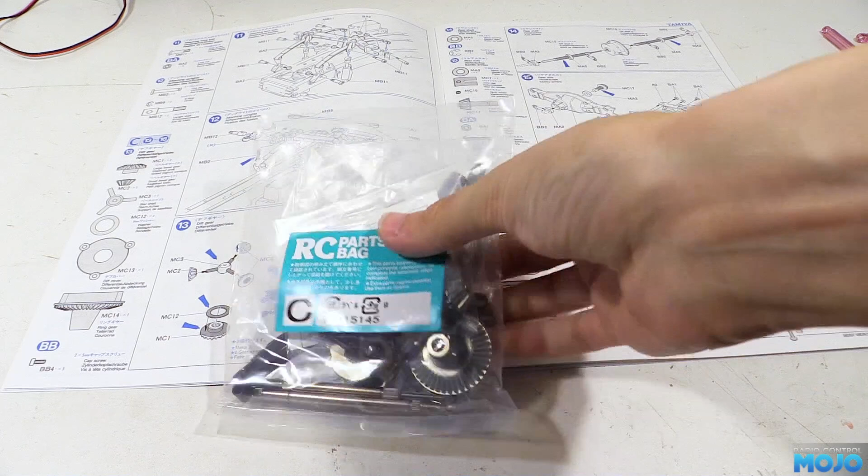This week we're putting the rear axle on the Tamiya 1850L. This of course is the drive axle, so we've got the differential and all the bits to assemble before hanging the axle on the chassis.

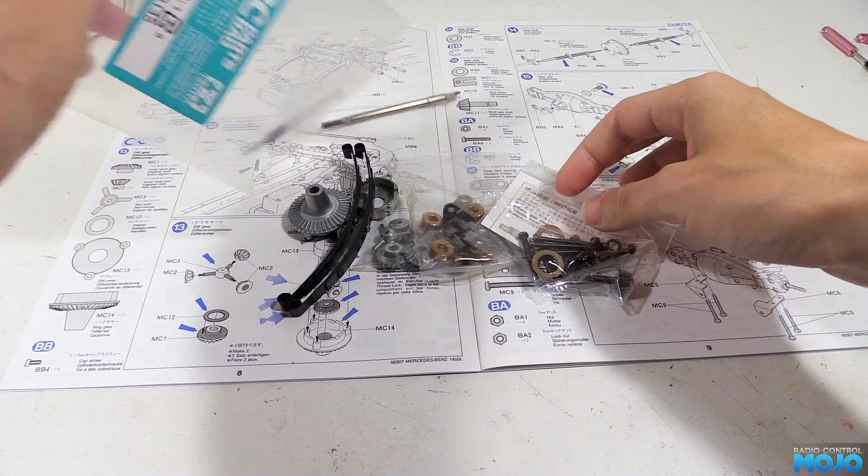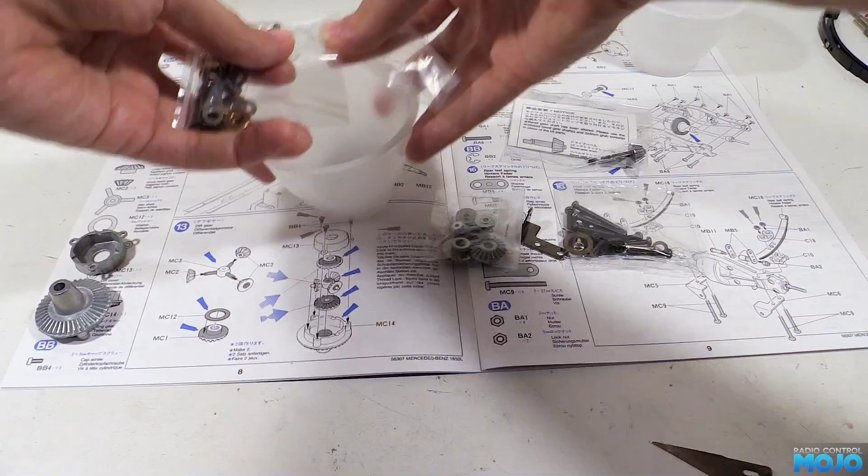In bag C then we've got a nice range of bits to play with. There's some familiar leaf springs, exactly the same ones as on the front. There's the damper mounts, an interesting packet with a pinion in. Now it looks like this truck, being one of the older 1/14th kits, has been updated to match the new kits. As usual then, we're going to pour the small parts bags into some plastic pots. There's a few bushings in this lot, so we will of course be replacing them with some proper bearings as we go.

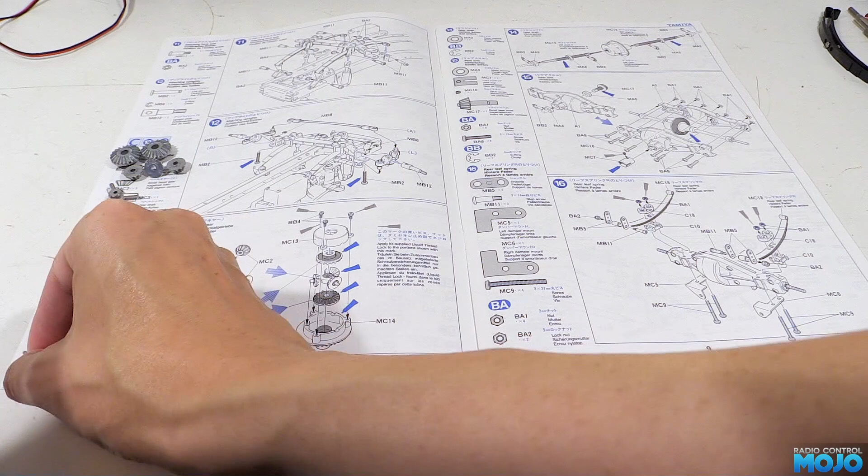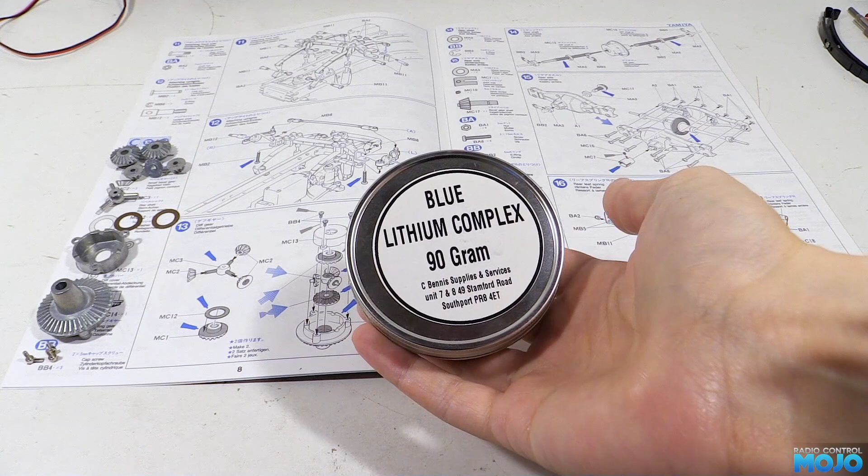For step 13 we're going to need the internal diff gears, which I'll add to the diff case halves I've already put out. We'll also need the two large skinny washers and three M2x5 cap head screws. Inside the diff we're going to be filling it up with some grease. Now Tamiya want us to use the ceramic grease from the kit, which after a bit of running usually ends up with a very free running differential. But I'm going to try using some of this blue lithium instead. It's a lot thicker and stickier, so it should add a little bit of stiffness.

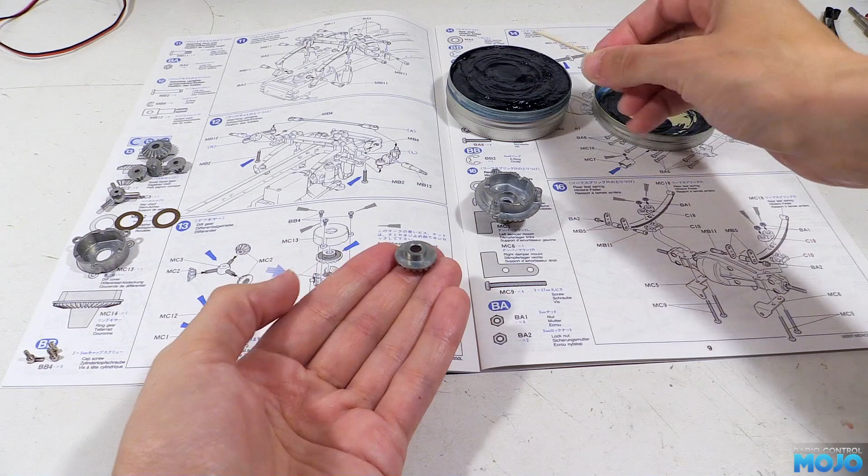The usual problem is, with a really free differential, if you're driving over uneven ground and one of the drive wheels gets a bit light, when you try and drive forward, all that happens is one of the wheels spins and you don't go anywhere. Now some people lock the diffs completely solid, which gets around the problem entirely, but it does increase the turning circle, so a good thick grease should be the best of both worlds.

A quick note from the future though, the blue lithium I use does make the diff slightly stiffer, but not by much. The theory's sound though, and I've heard that Lucas red and tacky grease works even better. Right, back to the build.

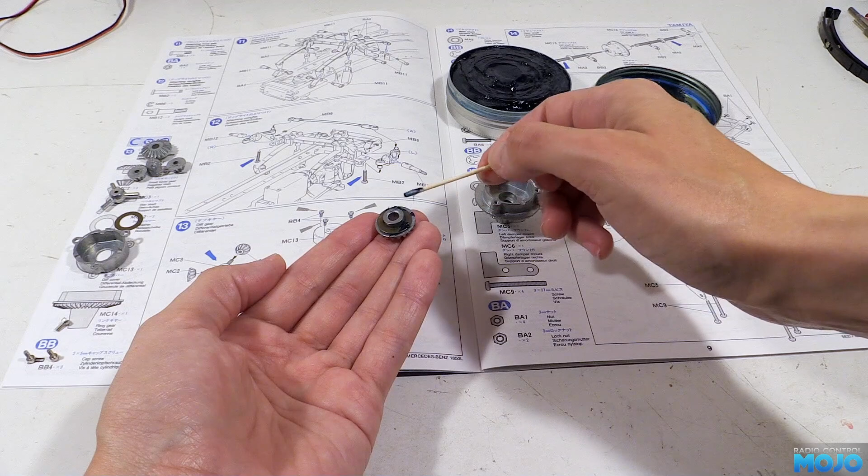Now we're going to start with one of the large internal gears and smear some grease on the inside face. Pop one of the big washers over the top and apply some extra grease. The idea behind the washer is to avoid the soft cast metal from wearing on itself. Having the smooth steel between makes everything last quite a lot longer. The gear now just drops into one side or the other of the diff housing. I tend to start with the side with the gear moulded into it.

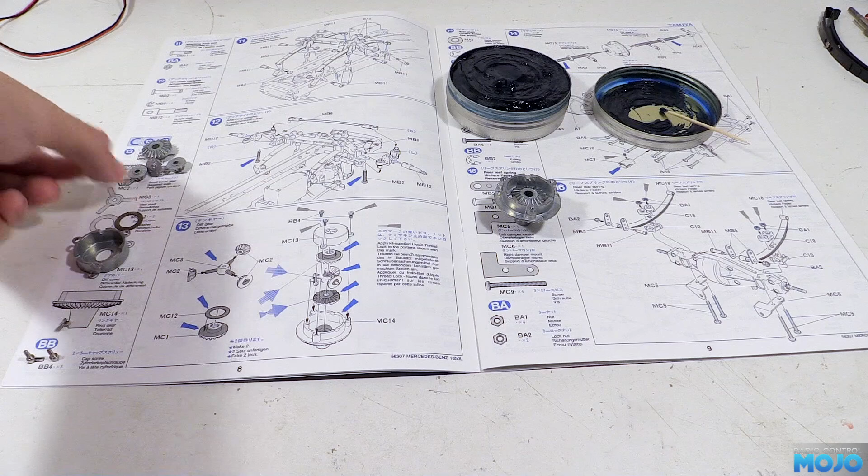Next we've got the star shaft and the little gears. Now each one needs a little bit of grease applying to the shaft before sliding on one of the gears. Don't worry about using too much, it's all going to get squeezed and spread around inside the diff anyway. Just watch out for getting any on your fingers. This blue stuff can be a bit stubborn to wash off.

Before dropping the star shaft into the case, we'll put a load of grease all over the gear in the diff. Again, we're going to use plenty. Pop the star shaft in, lining up the ends of the shaft with the notches around the diff case. Press it all the way down, and apply some more grease to fill the gaps. There's the other of the big gears to get ready with some grease and a washer, and with it all greased up we can pop it into the other half of the diff case.

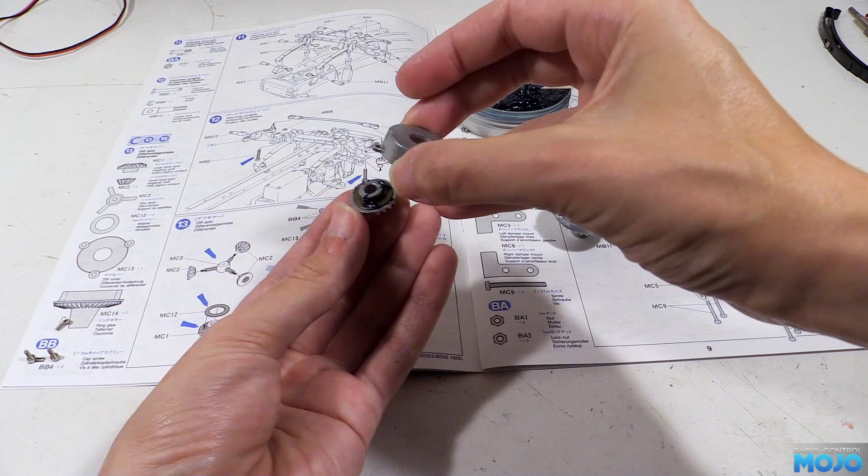Now before we screw the two halves together we're going to apply a little bit of thread lock to the threaded holes. It's good to do because if one of those small screws comes loose it can wreak all kinds of havoc inside the axle. If one falls out and gets trapped between the gears, it really won't do the parts any good at all. Install the three screws, doing them up a little bit at a time until they're all nicely nipped up.

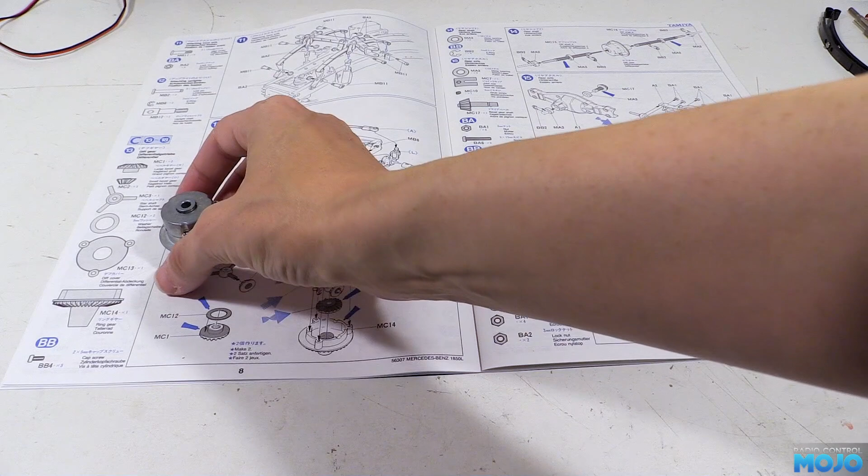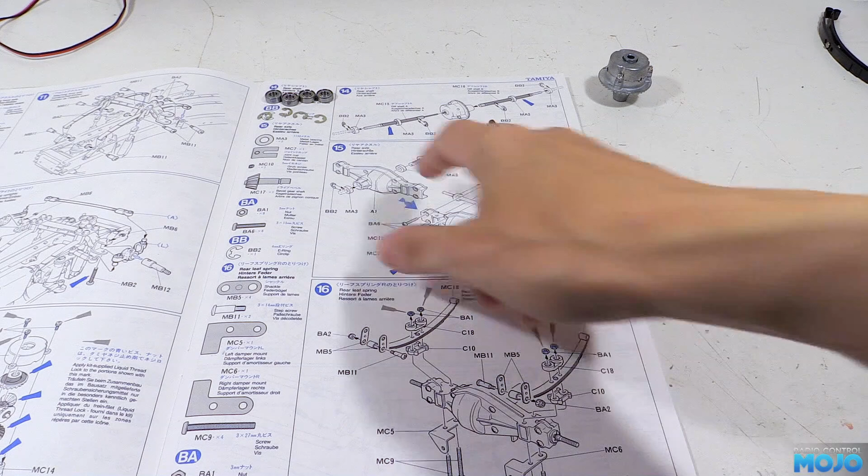Step 14, the axle shafts. This time we're going to need four 1150 bearings, four 4mm E-clips, and the two axle shafts. The diagram for these bits really isn't the clearest, and at first glance it makes it look more complicated than it really is. All we need to do is clip an E-clip in one of the slots at one end or the other of one of the axle shafts, doesn't matter which. Then we can pop two of the bearings on and clip an E-clip in at the other end. Same for the other shaft, and we've got the two shafts ready to go.

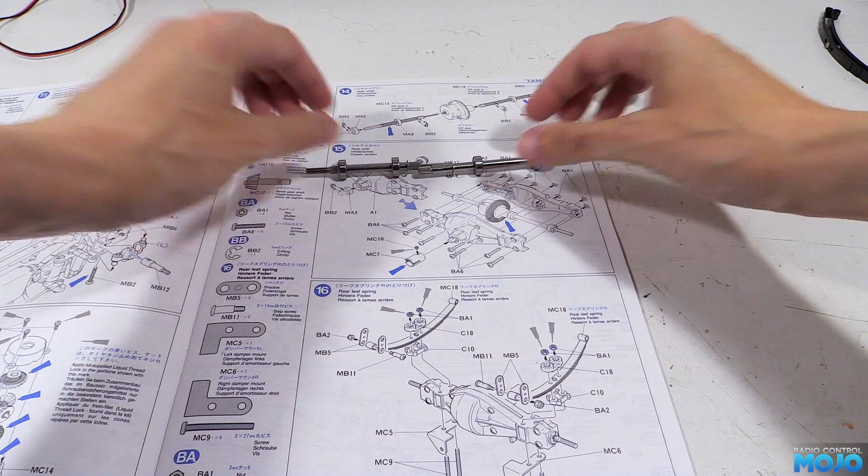Now one shaft has a pin on the end that goes into the hole in the end of the other shaft. The pin's going to spin in the hole when the diff's working, so we're going to use a little bit of grease on the end before we assemble it. In the gear side of the differential we can fit the shorter shaft, then on the other side we can fit the long shaft. Now at this stage if you try and turn the shafts in opposite directions it's probably going to feel very notchy and quite possibly you won't be able to turn it all that much at all.

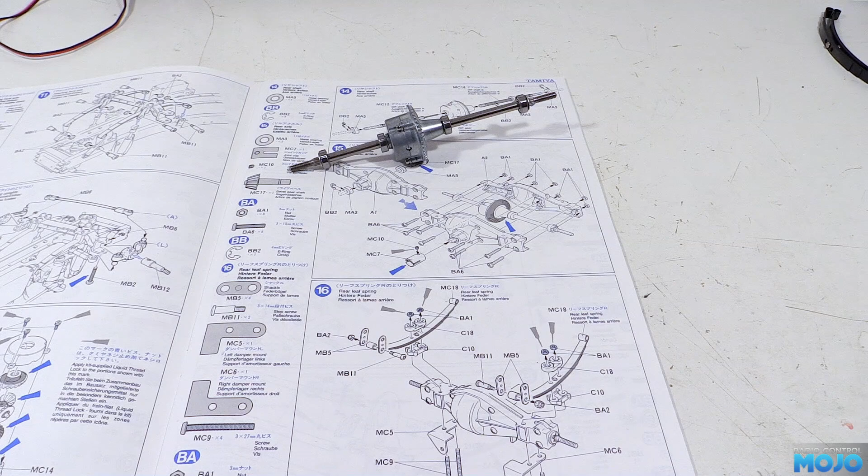Don't worry though, as long as you've assembled it correctly it's going to smooth itself out after a few minutes of driving around. It just takes some use to get everything to settle into position.

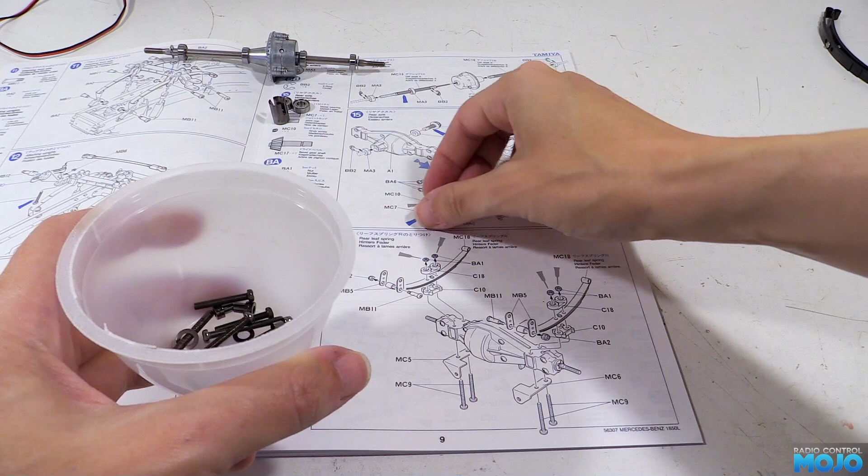Step 15, the axle housing. First up we need 2 more 1150 bearings, the drive cup with its short M3 grub screw, there's also the input shaft with the gear from the extra bag, which also comes with 2 more grub screws that are slightly longer than the one from bag C. Now it makes sense to use the longer ones, as we're going to be able to nip it up a little bit tighter without worrying about stripping the thread.

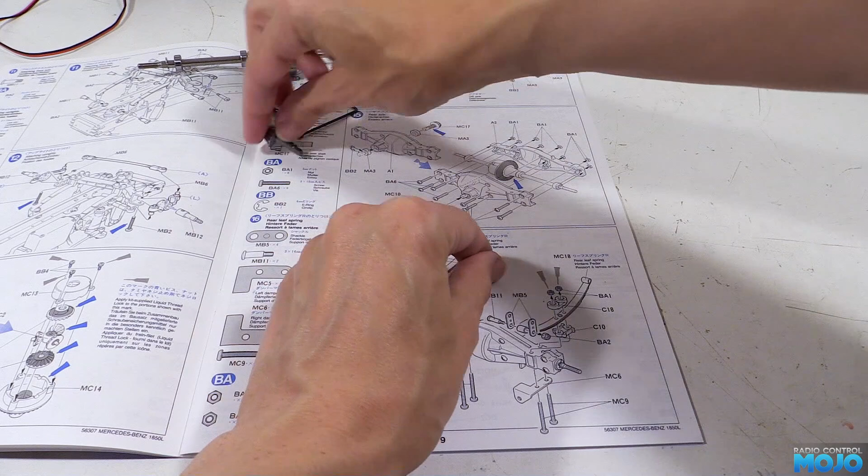So we don't end up losing the new grub screw, we're going to pop it onto the end of an Allen key, and we're going to put the extra long one and short one in the unused bits pot off to the right of the camera. Along with those bits, we also need 8 M3 plain nuts, 8 M3x15s, and a single 4mm E-clip. For the plastics, we just need an A1 and an A2, which are the axle housings.

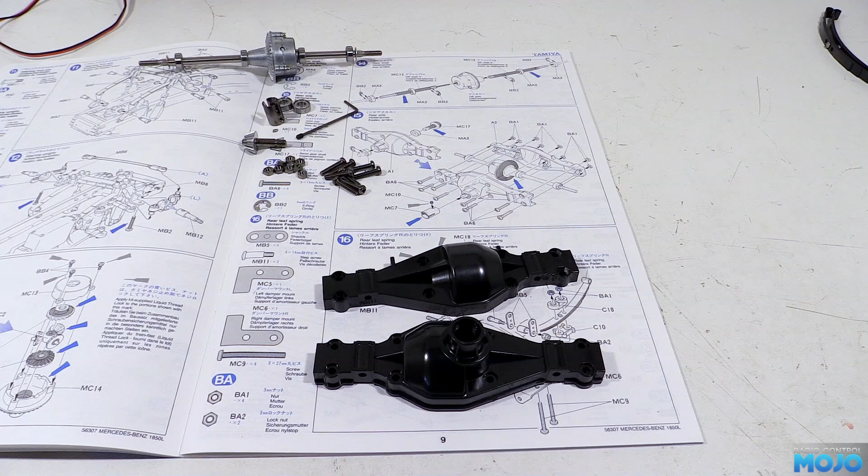Right, first job to get out of the way is to fit the input shaft. It uses the 2 bearings that we need to fit to the axle housing. The easy way to do it and get them in straight is to pop one on the end of the shaft and press it into the outside hole. It shouldn't need too much force, but we do need to make sure it's nicely seated all the way in. Then we pop the shaft out, add another bearing and reinsert it from the inside. Now the manual wants us to use some grease, but we're using bearings so we don't really need to.

With the shaft in, we can use an E-clip on the outside in the slot. Now usually with these Tamiya kits everything fits quite nicely, but sometimes it might be necessary to use a thin shim on one side or the other to adjust the mesh. I've never needed to, but I have come across a few people's builds where it was necessary.

Next we can fit the diff and the axle shafts in the housing with the input shaft. We need to make sure that the bearings are pushed all the way to the ends of the shafts so they're up against the E-clips. In the axle housing there's some little cups moulded in that keep the bearings in position. Before we fit the other half of the axle housing we need to run some grease around. I'm going to use some of the Tamiya grease here as it's quite a bit thinner than the blue stuff, so it's going to drag a bit less when running.

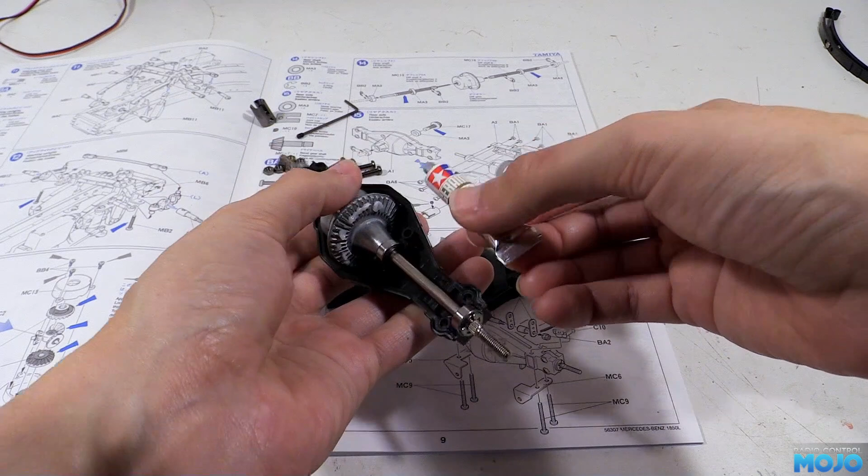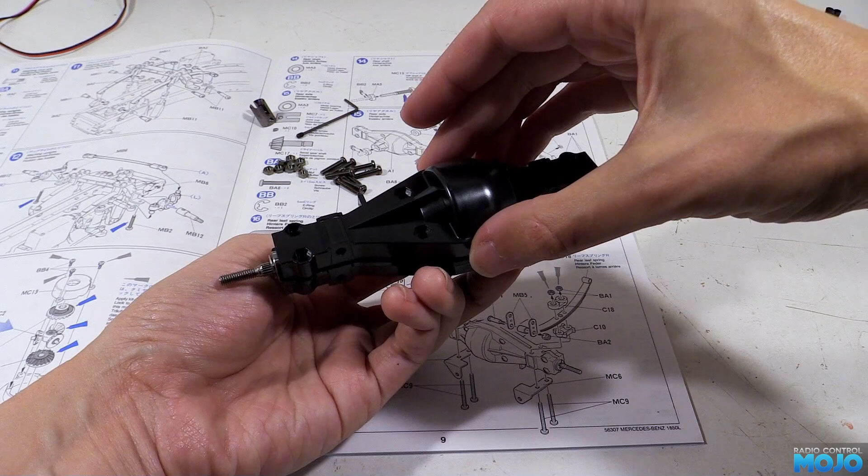Although, because these trucks usually run very slowly, it doesn't really matter too much what you use as long as it's nice and slippery. If we spin the diff a few times we can see the grease getting spread around nicely. As long as you end up with some grease over pretty much all the teeth, it's going to do the job. To attach the 2 halves we use the M3 screws and nuts. On one side there's 8 hex-shaped holes for the nuts, and on the other we put the screws in.

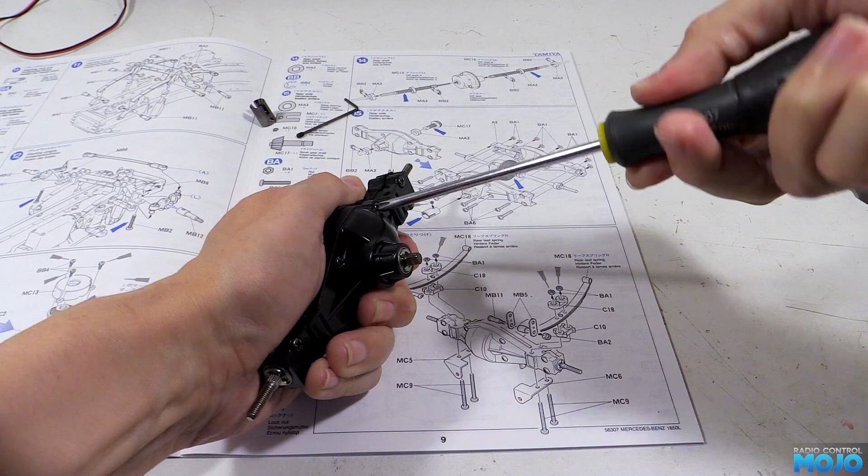It's not a bad idea to use a little bit of thread lock on these, but you can get away without as long as you keep an eye on them. If a couple come loose, it's not the end of the world. Or of course you could always replace all the nuts with some nylocks, which will lock them without the mess.

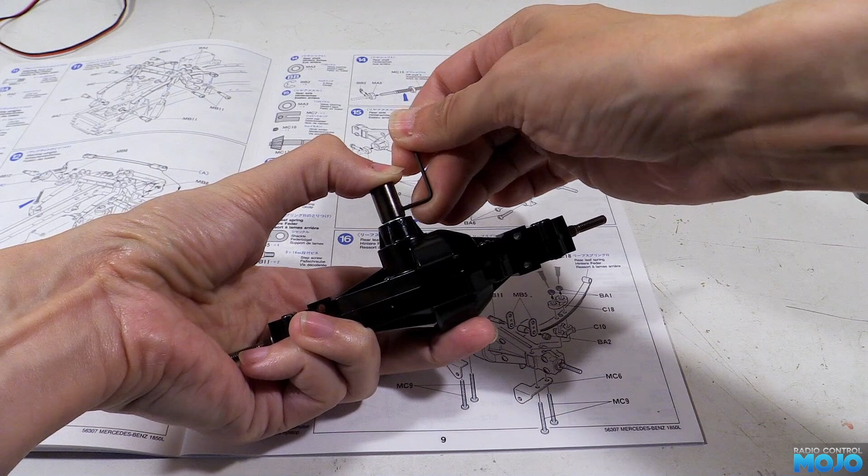There's one more bit to do now. We need to add some thread lock to the grub screw and install it a couple of turns into the drive cup. Pop it onto the input shaft, lining up the grub with the flat. Then while gently pressing it on, we can nip up the grub screw. Right, we should be able to turn the drive cup and see the ends of the axle turn. It's probably going to feel a bit notchy, but I wouldn't worry too much. It'll soon smooth itself out.

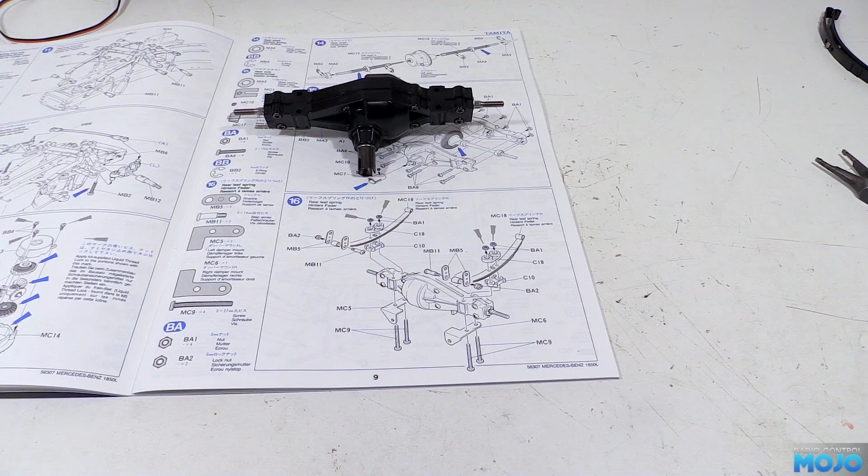Step 16, fitting the leaf springs. For this one we need the bottom damper mounts, the 4 shackle plates, 2 shoulder screws, 4 M3x27s, 4 M3 plain nuts, and 2 M3 nylocks. For plastic bits we need 2 C10s and 2 C18s, the bits that sandwich the leaf springs, and of course we need the leaf springs themselves.

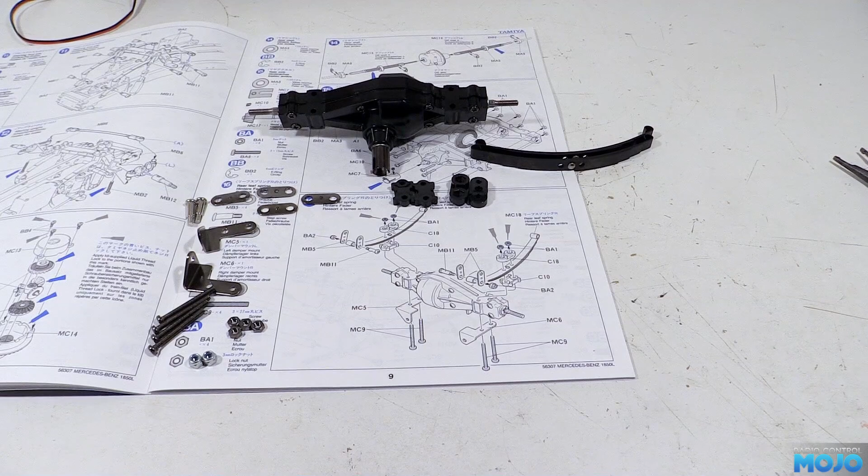First we need to make sure that we've got the axle the same way round as it is in the diagram. The input shaft should be facing away from us, and the tapered bit on the axle housing for the differential to the left. Then we just offer up one of the damper mounts to the bottom of the axle, so the mount is towards the inside, and we pop in 2 of the long screws.

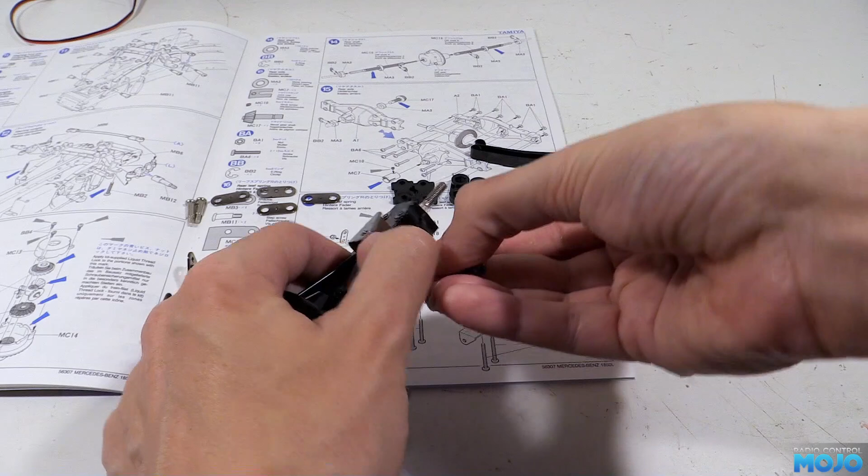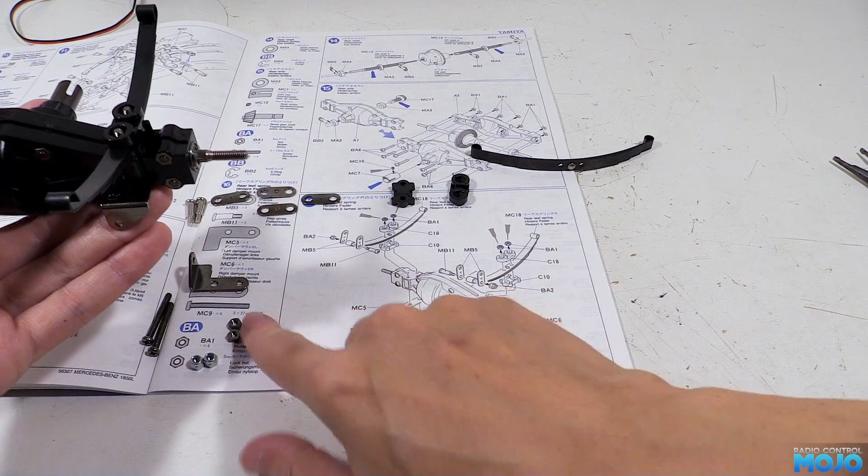Next, while holding the screws in, we need to fit a C10 over the threads, followed by a leaf pack, and then one of the C18s, making sure that the side with the hex holes is facing upwards. To hold it all together, we just need to install a couple of M3 lock nuts. Now these are good candidates for a bit of thread lock. We just need a little bit on the exposed threads, then we would undo the screw a few turns and retighten it.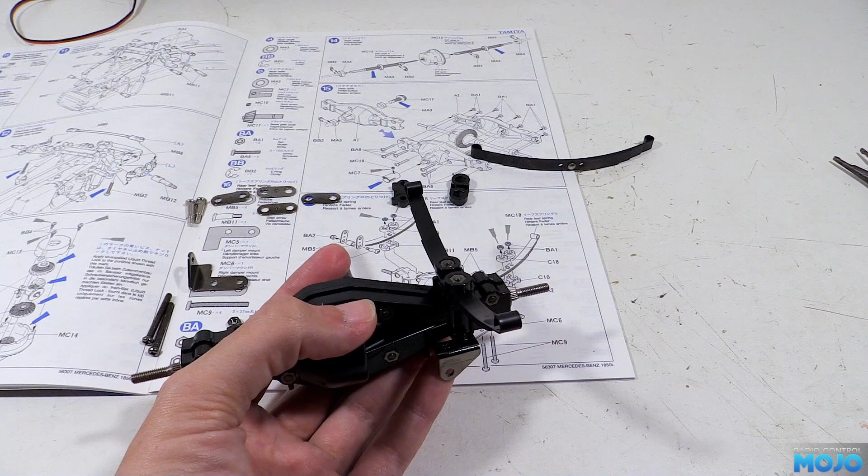Alternatively, there's plenty of exposed thread, so a pair of nylocks would work pretty well too. Repeat on the other side, and that's the leaf springs mounted. It's worth mentioning that the long screws are going to be loosened again, so we can set the position of the springs when we hang the axle on the chassis, so don't worry about doing them up super tight just yet. That leaves the shackles.

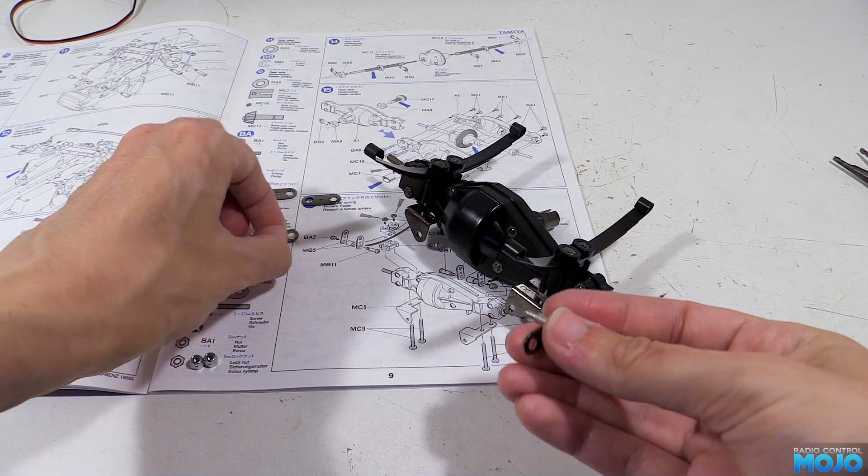All we need to do is pop one of the plates over the shoulder screw, insert it into the end of the spring, pop on another plate, followed by a nylock nut. The only thing to watch out for is that you install them on the right end. They should go to the rear of the assembly, so that's the side without the input shaft.

Also note, I installed the nuts on the inside, which worked okay on the Hercules Actros, but as we'll find out in a moment, you really do need the nuts on the outside on this chassis. Install both shackles, and we've got the axle ready to install.

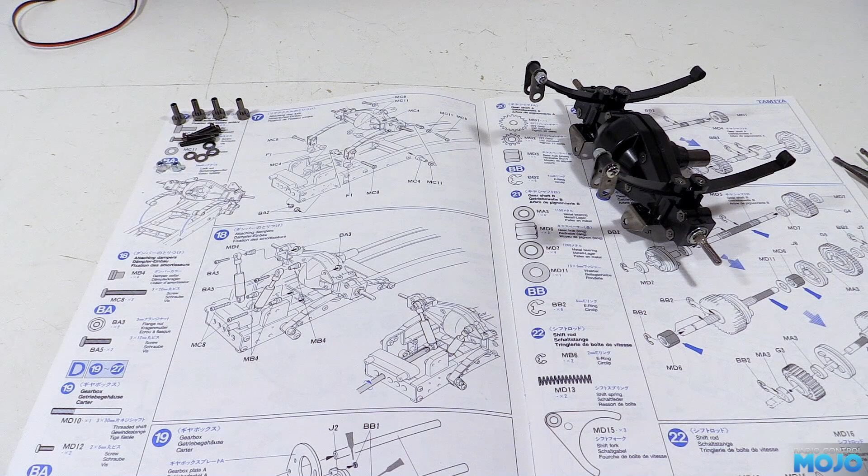Okay, step 17, hanging the axle. We're going to need 4 M3x20s, 4 leaf collars, 4 4mm washers, and 2 M3 nylocks. And then for plastics, we've got 2 F1 spacers. Okay, to mount the axle, we need to pop one of the leaf collars into the hole in the inner shackle plate. Slide on a spacer, then pop the other shackle plate over the end.

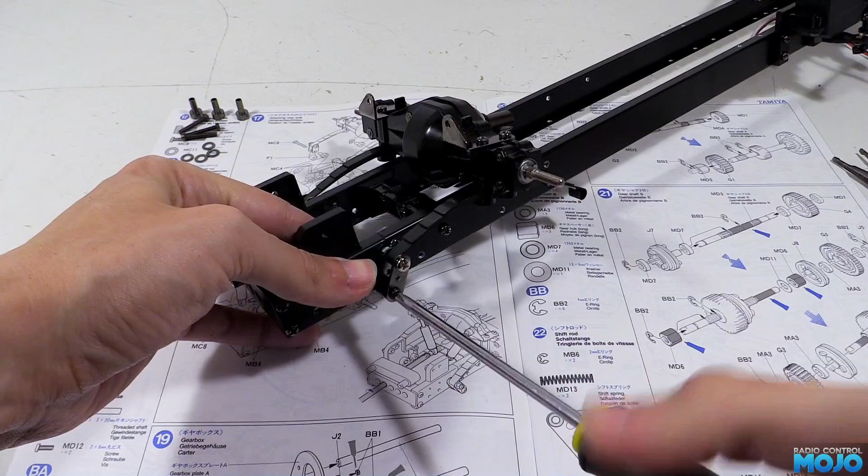It gets offered up to the hole on the chassis extension, and we use one of the nylocks on the inside where there's a hex-shaped hole to hold it. And we use one of the long screws from the outside. The collar is sized so we can tighten the screw all the way and not worry about any binding.

However, because we fitted the nut to the inside of the shackle, it does rub quite badly, causing a bit of a bind. It's a shame because it does look a bit tidier with the screw heads visible, but it's just not going to work. Still, it's easy enough to swap them over. We just remove the shackle from the chassis, then swap the shoulder screws around. It really doesn't take long, so no great loss.

Anyway, we can refit the collar, spacer and axle to the chassis extension, and this time it moves nice and freely. Install the other collar and shackle to the other side, and we can start working on the front leaf mounts. We need to use another leaf collar, this time inserted straight into the end of the leaf spring. There's no spacer, but we do use one of the washers on the end.

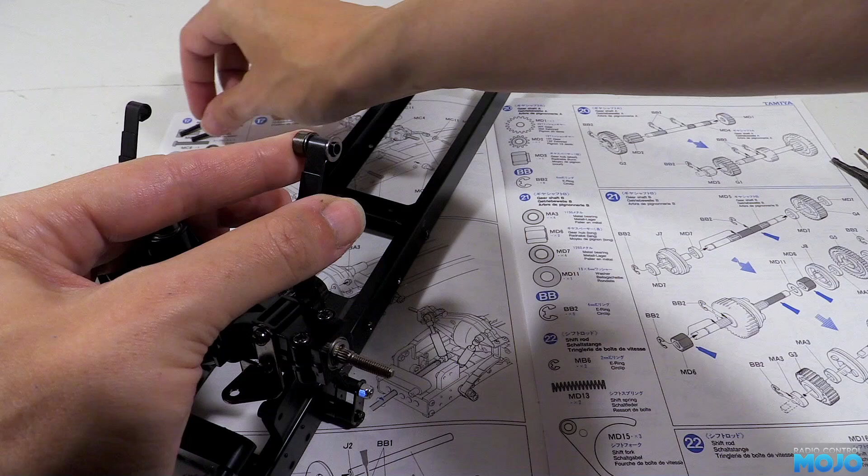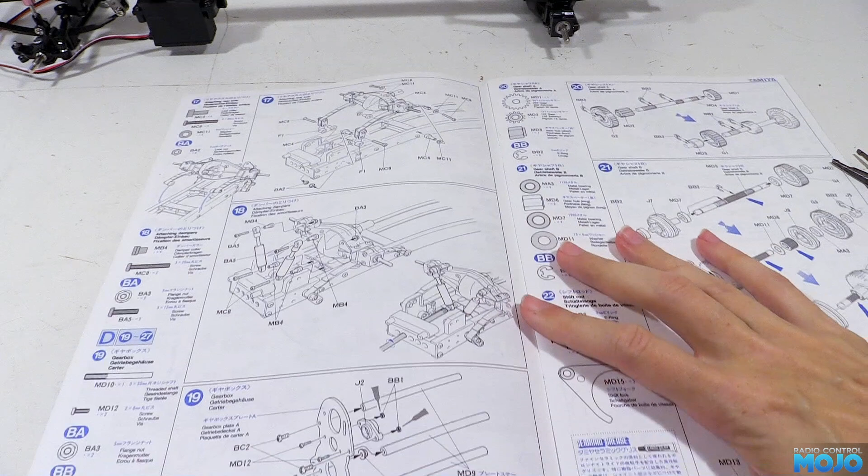To attach it, we use one of the long screws that screws into a captured nylock we installed right at the beginning of the build in one of the cross members. Again, the length of the collar means we can go straight in and tighten up the screws. Repeat on the other side, and that's the axle hung on the chassis. Don't forget to loosen the 4 screws that attach the axle to the leaf springs and retighten them. Just like with the front axle, it'll let the springs find their own position so they move nicely without binding.

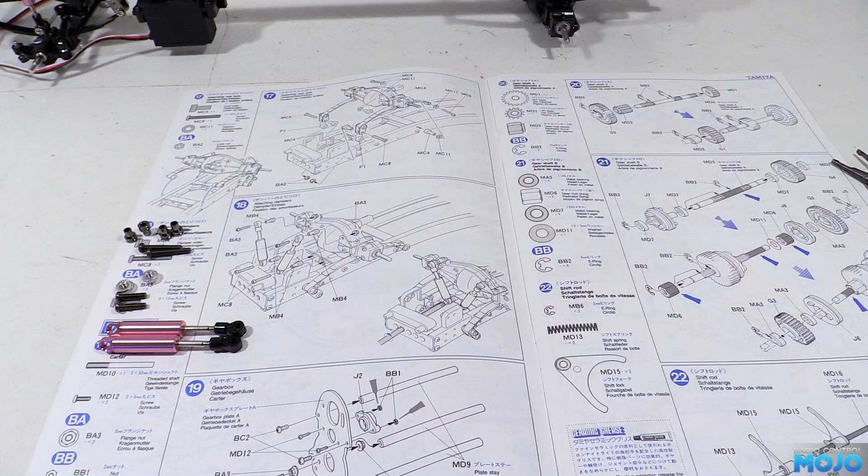Step 18, fitting the dampers. We'll need the 4 damper collars, 2 M3x20s, 2 M3 flange nuts, 2 M3x12s, and the dampers. The top of the dampers attaches to the cross members that we installed the press nuts into right at the beginning of the build. We just pop one of the damper collars in the top of the damper and install it with one of the long screws. Now it's important not to press too hard until you take up the slack, or you're just going to press the press nut out the back.

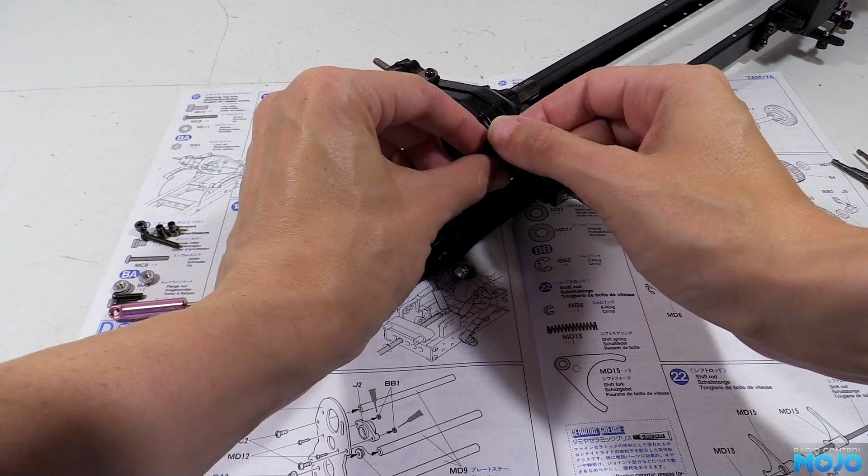Once it's nipped up, it's evident that we've got the same little niggle that we found on the Hercules Actros. With the bottom of the damper up against the mount, it's leaning back at quite an angle. When the suspension compresses, it's only going to get worse, causing a bit of a minor bind. It'll work okay, but it's such a simple fix we might as well make it work properly. All we need to do is add an extra plain nut behind the damper collar. You could use a stack of washers too, anything really that will space it off 2 or 3 millimeters.

Now when we fit the damper, the bottom lines up with the bottom mount with some angle to spare. Now when the axle moves back, when the suspension compresses, it's not going to bind. The bottom just needs another damper collar, one of the shorter screws, and a nut. When it's all nipped up, the suspension should move perfectly smoothly with a little bit of slop. If it's tight or stiff, you've got something that's unhappy. Generally, if you loosen all the screws and retighten them, it'll sort itself out. With the other damper installed, we've got the rear axle hung and ready to go.

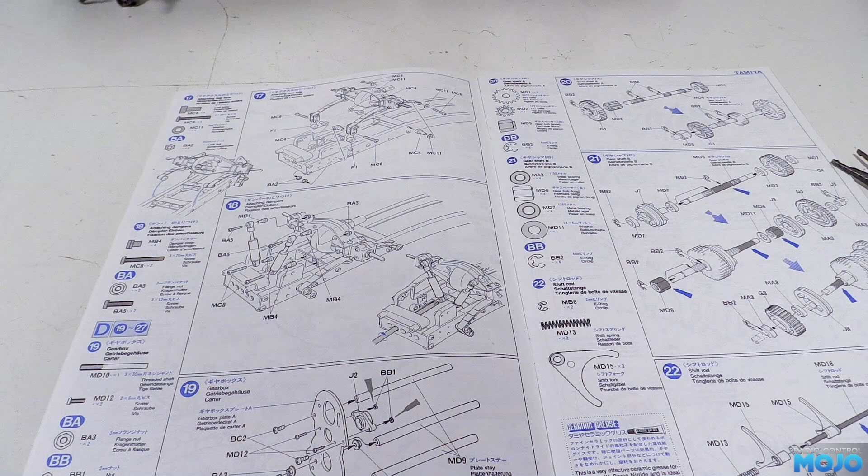So that's it for this week and bag C. Next time on the 1850L we're going to be on to bag D and the gearbox, the bit that a lot of people seem to dread.